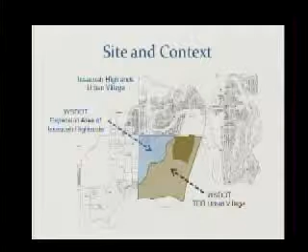Zooming in a little bit, this light blue dashed line is the WSDOT TDR Development Agreement boundary, and again, the property. I'm going to give a quick tour of what's around it. To the east is Central Park, which is mostly built out but not entirely. To the north is Grand Ridge Elementary, with the building at the north end of the property near Park Drive, and their playfield is down here, below the road.

The orange represents some of the immediate residential in the area. Mostly it's single family, but this project here, Avalon Windhaven, includes stacked flat and garden apartments. There are two wetlands. The main one that affects Bellevue College is this one, and then there's one to the south. They're both in what we call the WSDOT rural or WSDOT open space. Along the immediate east edge, in gray, is the BPA power corridor, and then there is a protected 100-foot buffer on that east side.

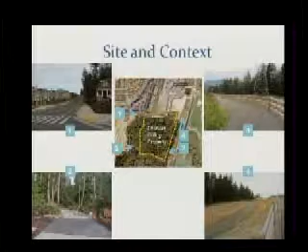So the trail, the path, is it completely inside or outside of the property? The King County Trail, those two ends I'm showing from 2 to 3, the trail goes all the way through. It does not go through Bellevue College's property, it's just south of their property.

It'll show up on another map here. Sorry, that's the hardtop trail, and that won't be disturbed through the process. They're proposing some connections, but the trail is complete. Okay, thanks.

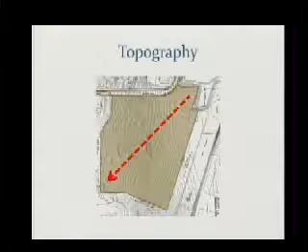So this is the existing site topography. It drops about 130 feet from the upper northeast corner to the lower southwest corner.

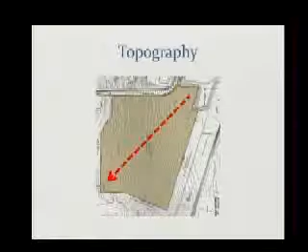There are 2 main roads that connect to Bellevue College. One is Park Drive, and the other is College Drive. College Drive was built, most of it, not all of it, as part of the improvements with the WSDOT development agreement.

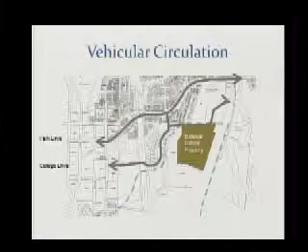Along those roads there are sidewalks on both sides, bike lanes on both sides, and in addition there's the trail along the lower south edge.

In terms of immediately adjacent off-site circulation changes, this gray line here is where College Drive is currently located, and they're proposing to make it into more of a traditional intersection with potentially a roundabout here. There would be 2 connections from College Drive into the site, and then 1 trail connection.

This continues on down to connect. They've proposed a 3rd pedestrian and vehicular connection down here and this is just a graphic thing. These 2 pieces would actually connect, but I couldn't make the drawings do it.

They're proposing a 3rd connection that would come off their property through the forested 100-foot area and then into the BPA and up into this existing roundabout in Central Park. This is obviously all off-site.

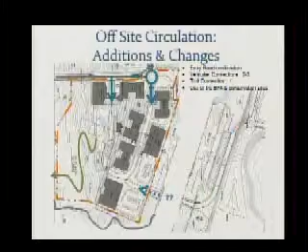On-site circulation, there is a street section pretty much all the way around the loop, except for this eastern part on what we call the Upper Loop Road, which is more like a mews. If you remember some of the mews.

Thank you for laughing, Nina.

It's a street section in that pedestrian facilities are provided separately from the travel lanes, but you don't necessarily have curbs, and you use bollards to denote the different use areas. So it makes for more of a flow all the way across from building to building.

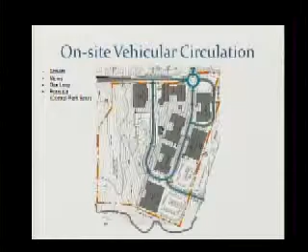They proposed a bus loop off the east side of the roundabout like this, and then again that potential road that we called the Central Park Spur.

For on-site pedestrian circulation, again, the streets have sidewalks on both sides, and except for the Central Park Spur Road, all of the roads have bike lanes.

There is also in the plazas essentially what I called in the staff report a pair of pedestrian axes that provide a lot of the on-site pedestrian circulation.

I also wanted to point out that in this area, if you came in on one of these two sidewalks, you'd go under the overpass, and then there's a ramp system that brings you up on top of the podium.

As I mentioned, this is a pedestrian bridge and this is a pedestrian bridge. So these plazas, these pedestrian axes are actually going over the road, providing completely segregated pedestrian circulation and gathering spaces.

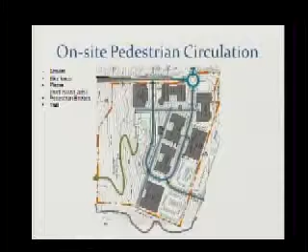And then there's a trail, this is an amphitheater, and they've proposed a trail that would connect down to the King County Trail.

5 buildings are proposed. They have 372,000 square feet, which is the maximum, plus additional square footage for accessory uses. They've done this, as I mentioned a moment ago, in a podium configuration.

This creates a level plane, partly for overlook, partly to minimize regrading, and partly to ensure that the entire site is accessible to people with disabilities.

And then the other building that you saw in here that was not highlighted is a structured parking garage, the ground floor of which would have a retail sort of front. So the idea really is that this upper loop road be strongly framed by buildings.

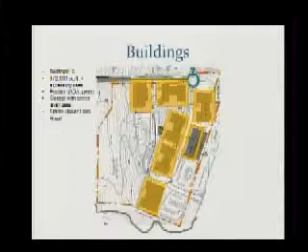In terms of open space and public plazas, there's a very sizable area up here at the north, and then smaller spaces along this part of the spine, as well as each of the entries along the upper loop road.

On the west side of the site, there's the amphitheater — that's a proposed feature — and some kind of outside gathering piece, and then the two smaller green ovals represent meadows, as they described it. They're beginning to make a transition back into the forested area, and the clouding here indicates the edge of where they would clear. So most of the western portion of the site would remain untouched.

And just because I know you guys are always interested in how large blocks are broken down, this block is about 700 feet in length, and these pedestrian through-routes break it down into 200 or 250 foot long blocks.

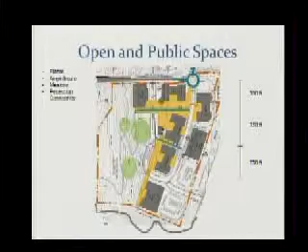Parking — the map on the left really is just to show you the buildings we've been looking at along the way, so you can get a sense of what's happening below those buildings. All the buildings along here have under-building parking. The building on the east side of the site also does, and it receives its access from the parking garage right here. These brown arrows indicate where you access the parking.

So they've really concentrated the access to the garages on the lower loop road, and off the parking lots down here, to keep this area free from heavy vehicular traffic. About 10% of the parking is in these two surface parking lots. Now, keep in mind this is at build-out — there will probably be predominantly surface parking in the early phases, but this is the full build-out scenario.

As I mentioned earlier, there's additional parking proposed in the BPA over here on the right. This blue box represents everything under the buildings, and the podium is not just parking — that space would be a large, open, potentially high-height space that could be a gym, a performance hall, or a dance studio, depending on the kinds of programs that end up locating out here.

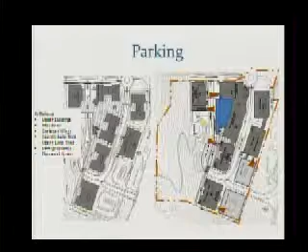So now for the part we all love — I'm going to go through the conditions. I'll only read through the ones that are non-standard. If you happen to see the memo, we've made a few changes to the staff report. One of those was to put all of the construction conditions in a separate attachment. That's the good news, but it means that most of the conditions attached to the staff report are not standard ones — so there are fewer of them, but more unique ones.

So condition 1 is a standard condition. Condition 2, prior to the submittal of any permit for construction, yeah — oh, I'm sorry. No, it is 36. Someone's paying attention. Yes.

Ready? Okay. Prior to the submittal of any permit for construction — for example, the project feasibility pre-application meeting required by condition number 5 — the applicant shall provide the city with a plan that includes all dry and wet utility vaults, cabinets, switchgear, pull boxes, meters, equipment, and appurtenances. The purpose of the plan is to confirm that the location of this equipment is consistent with the approved SDP, pedestrian orientation, and the sociable public realm. Anything not shown on the preliminary submittal — location, relative height, presence at the surface or above ground — is presumed to be located within the structure. Any revisions or additions to what the preliminary submittal has shown and approved outside of the structure requires modification, except fire hydrants.

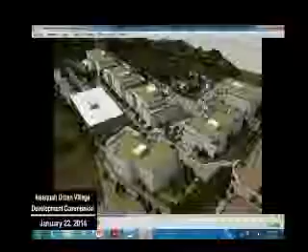One of your slides actually said there were 5 buildings. There's actually 6 buildings. And then this is the parking structure right here. 6 buildings plus the parking structure. Thank you.

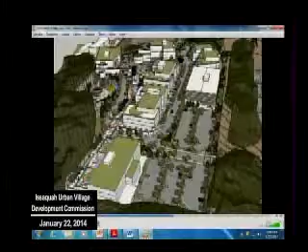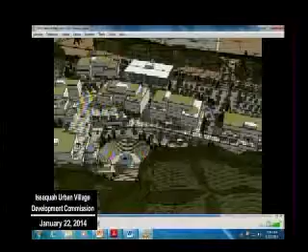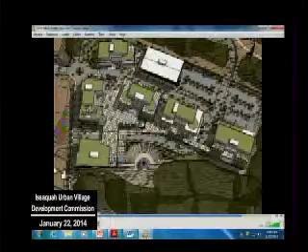Can we go around? Are we all the way around? Almost. Let's see now. Maybe I don't know how to stop this thing. Chad, is there a way to stop it? Oh, there. Oh, okay. Great.

Okay, thank you, Lucy, Ray, Jim, Dan. Nobody with more than 4 letters, interesting, for some reason. Must be a requisite of the job. Carl, yes. Nina.

We will have public comment later on in the agenda, but I think I'd like to open it up for the commission for questions, comments, discussion amongst ourselves, and then we'll do public comment and close with more. Kind of practical stuff right now? Yeah, any questions we've got of anything, I think, of the conditions that Lucy had, and questions from the applicant as well. Chantal, we'll start with you.

I guess, traffic-related, transportation-related comments or questions. One is, with that much structured parking, why still have that much open, impervious surface covered, a quarter to a third of the land covered in open air parking, when you could put everything structured?

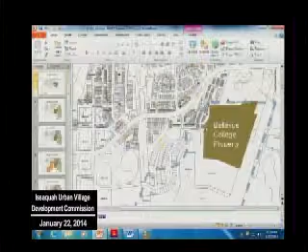So is 15th like going through those apartments? Yes, it's where the new signal was installed at Park. I was in the area, both 15th and also Northeast Falls Drive, which goes through a fairly tight neighborhood right there, which I can imagine kids playing at. And 15th is extremely narrow. So this is an option, but the expectation is that it would be Park Drive to 15th and then up to College Drive.

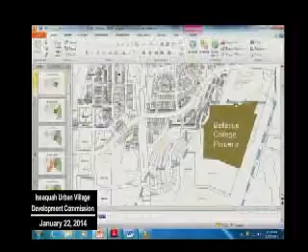I just expressed some concerns in regards to that. It just seems like 15th goes through a fairly tight apartment complex right there. And the other option, Northeast Falls Drive, is a fairly secluded kind of neighborhood almost, where that road's not expected to be a real thoroughfare. And it's going to be a stark change to accommodate a college campus, so I think some thought needs to be put into that. I would imagine people are going to go Northeast Park Drive and then come down into Central Park. You have some of the parking that possibly will happen with the BPA. That road too is extremely narrow. So I just wonder if there are plans to use that drive to expand that road or not.

I'd like to echo Eric's concerns as well, that 15th Drive is an extremely narrow passageway through a heavy residential apartment complex to get to College Drive. I think this vision is fantastic from the perspective of the campus and what is to be. I do have reservations, however, about the accessibility and the major thoroughfares to get up to the property. 15th, case in point, Forest Ridge, if you're looking to redirect traffic up, that's a very dense residential neighborhood now, with very narrow passageways as well, parking on the street through that passageway. And then when we looked at Park Drive, we have heavy traffic going up into the Highlands. If the intent is to make a right-hand turn to travel southbound on Central Park Drive, again a very narrow passageway with heavy pedestrian utilization to Central Park and all the activities, the sports complexes up there. So I would just ask, as we move forward with this process, what's our vision for accessibility and how can we accommodate those increased volumes considering the heavy pedestrian utilization and those thoroughfares?